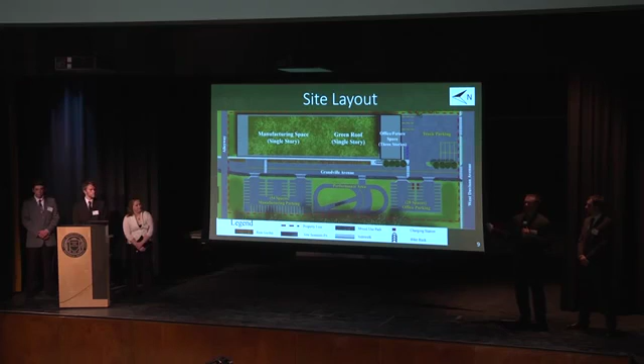Thank you, Ryan. The first part of the structural part of the building was to design the building. The design was developed using Revit 2014. The team decided to make the building 69,600 square feet. The first story, which is the manufacturing with some locker rooms and the display area, is 57,000 square feet and it's 30 feet tall. The second story is directly above the locker room and the display area, and it has some initial offices and the break room. The third story is 7,200 square feet. It spans the entire south end of the building.

The structural scope of this project was to calculate the loads, design the RISA models, determine the steel member selections, design the connections, the connection details, and the floor and roof systems. The load calculations were performed using ASCE 7-10. Snow was determined to be 20 PSF. The maximum snow drift from the third story to the manufacturing building was 40.6 PSF.

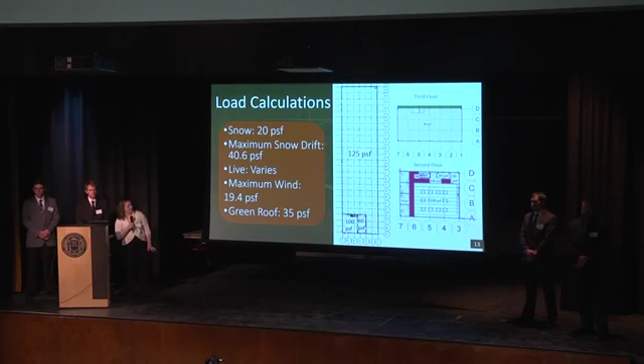The live load varies throughout the building depending on the room, as shown in the figure to your right. And the maximum wind load occurs on the west side of the building with a wind load of 19.4 PSF. The green roof, an additional dead load covering most of the manufacturing building, is 35 PSF. The floor and roof systems were developed using the Vulcraft steel and roof deck system catalog. The floor systems were designed with the same assumptions for load criteria, so the same composite floor system design with 4.5 inches of lightweight concrete and a 1.5VL22 deck size. The 3-story and the manufacturing roofs have slightly different loading criteria, so therefore they have 2 different roof decks.

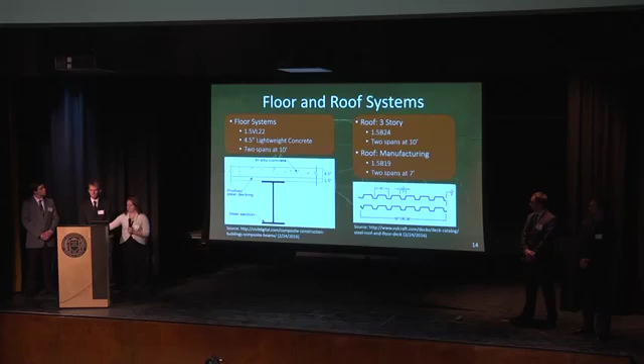RISA was done to analyze the structural aspects of the building. Some of the key features of the structural part of the building are the carrying trusses, which are located every 20 feet, spanning in the east-west direction. The jack trusses, which span in the north-south direction, are located 40 feet apart. The X bracing is along the east and west sides of the building, and the chevron bracing is on every floor of the three-story area.

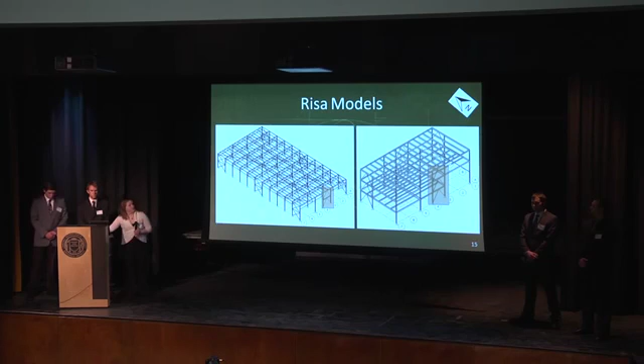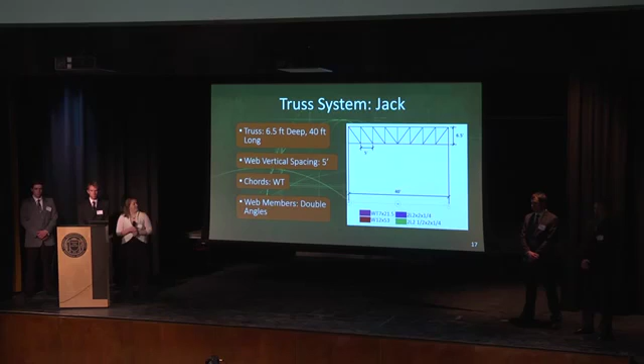Once again, the truss system, the carrying truss, is a Warren-style truss. It is 6.5 feet deep and 40 feet long. It has purlin spacings of 6 feet 8 inches because of the geometry of the truss. The chords are WTs and the web members are double angles. The jack truss is a similar design; however, its web vertical spacing is 5 feet, but it also is 6.5 feet deep and 40 feet long.

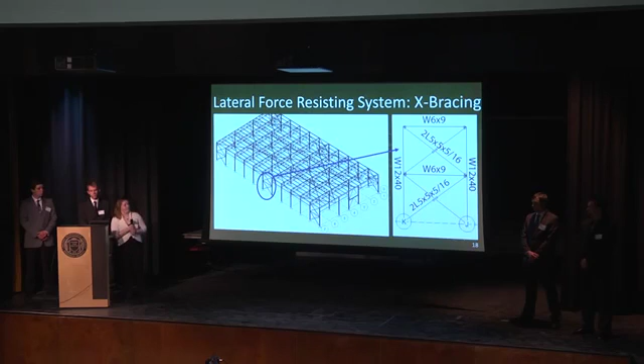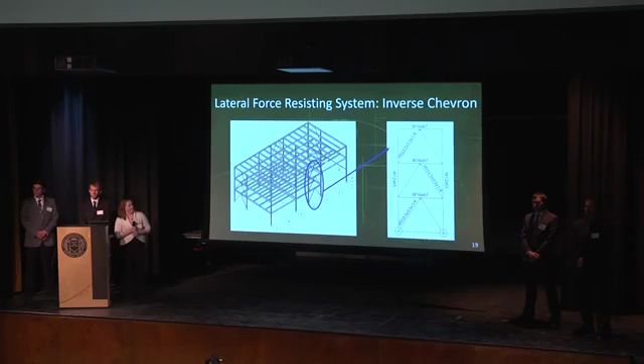X bracing was used as a lateral force resisting system to help with the wind loads applied to the building, along with wind columns. To your right is an example of member sizes for the X bracing. Inverse chevrons were used in the three-story area, also for the lateral force resisting system, and those are some sample sizes for those.

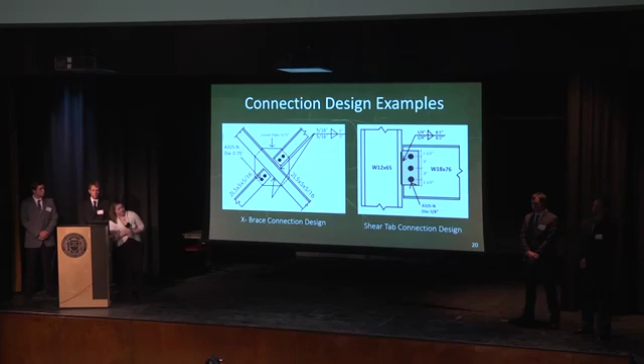Connection design was one of the last things that I had to perform. There were 5 that I calculated. They include truss, shear tab, extended shear tab, X bracing, and the base plate connections. These are the final designs for the X brace and the shear tab. Now I'll pass off to Aaron for geotechnical.

Thank you, Ashley. As the geotechnical engineer, my main focus has been the foundation design for the building after determining a design soil profile for the entire site. I will also be discussing some of the key scope items that I have completed. My research began with consulting the Michigan Quaternary Map to identify the geologic conditions of the local region. Our site in particular features predominantly lacustrine type soils, which results in compressible clays. These softer clays comprise the majority of our soil design profile.

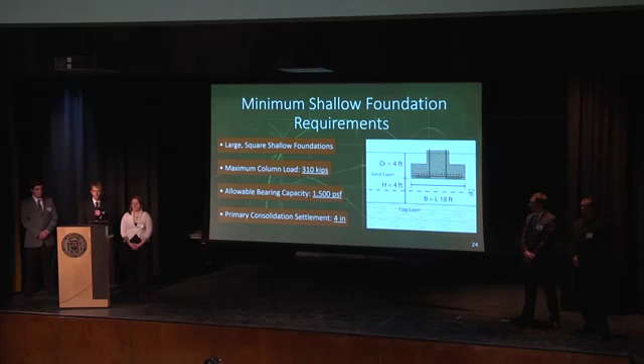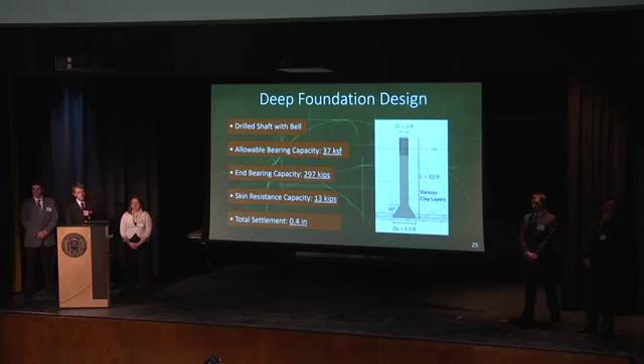At the top of the profile, we have a layer of silty sand. The groundwater table is at a depth of about 6 feet, and at a depth of 51 feet, we encounter the hard pan. The minimum shallow foundation requirements place the footing in the silty sand layer 2 feet above the water table. This allows an allowable bearing capacity of 1,500 pounds per square foot. However, there is over four inches in settlement, so this type of foundation is not suitable. The selected foundation type for our project is the drilled shaft with a belled end. The total length of the foundation is 52 feet to extend and terminate in the hard pan.

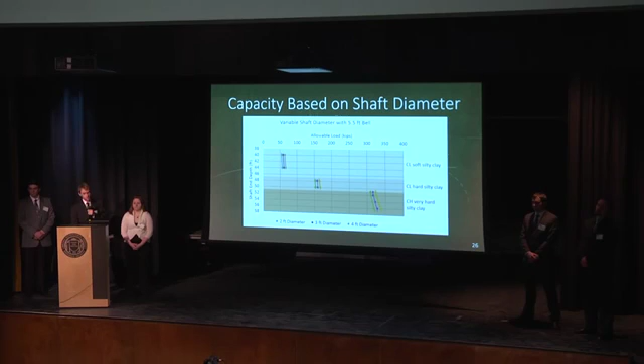This graph is a depiction of the allowable load capacity of one foundation as a function of the length of the shaft, or the length of the foundation, and the diameter of the shaft with a constant fixed bell size. The target depth is at least 51 feet to reach the very hard silty clay layer. There is not much contribution to the overall capacity based on the shaft diameter, so 2 feet is selected in order to minimize cost.

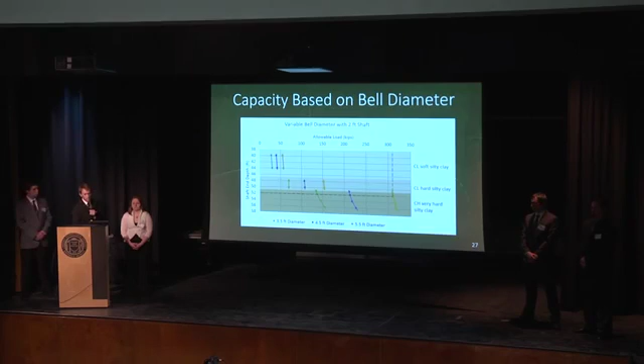This graph, on the other hand, is a similar graph. It shows a constant shaft diameter with a varying bell diameter, and that allows a much greater influence on the allowable load capacity of the foundation. If we have a 52-foot length foundation and a 5.5-foot diameter bell, that allows our foundation to reach the maximum column load.

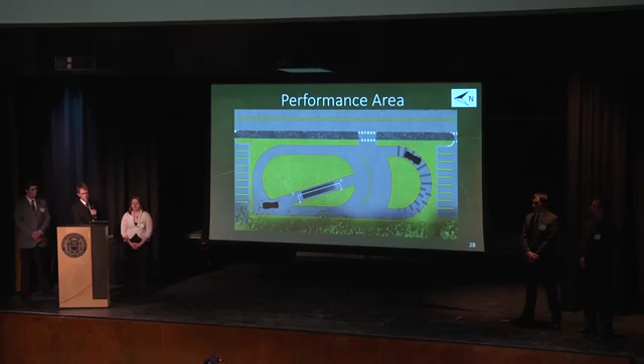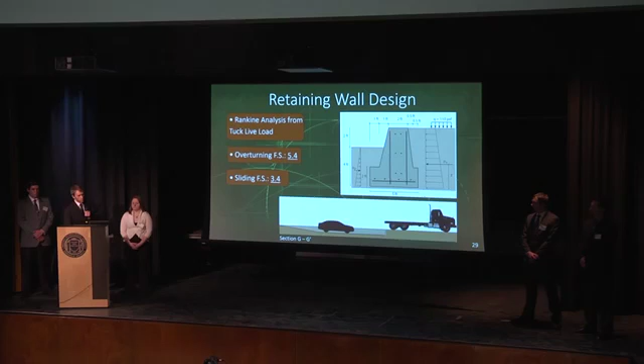The performance area for the complex is one of the major components. It allows Detroit Wrecker Sales to test their products on site. One feature of this performance area is a ramp that leads to a flat pit to allow for a towing scenario. The section at GG shows a 2-foot elevation drop at the pit and a gravity wall retaining system. The truck pulls up to the top of the wall and lowers its bed into the pit and can retrieve the vehicle from inside. The earth is subjected to a live load from the truck, and the gravity walls were designed with a Rankine analysis for active pressure. And now I will hand it off to John to talk about water resources.

Thank you, Aaron. Scope of work for the water resources for the project was to analyze the stormwater removal from the site. It began by gathering the required design documents. From there, the stormwater management plan was developed, taking into account both the environmental and sustainability considerations of the plan. Finally, the discharge water quality from inside the building was assessed. The design documents that were used were first the Wayne County Stormwater Management Program, followed by the Green Infrastructure Plan for the Upper Rouge Tunnel area, and finally the Low Impact Development Manual for Michigan.

Performance standards for the stormwater management plan are broken into two criteria to address environmental impact as well as stormwater runoff. The water resources protection is based on an 80% removal of suspended solids from the first flush of all rain events, first flush being the first half inch that occurs. This removal will happen through capture in the bioretention cells as well as at the pretreatment inlets. Flood protection will occur through detention of 90% storm events. This is the time occurrence, 90% of all storms we can expect to detain on site that are 1 inch or less. 2-year, 24-hour, and 10-year events will be a combination of detention with metered release.

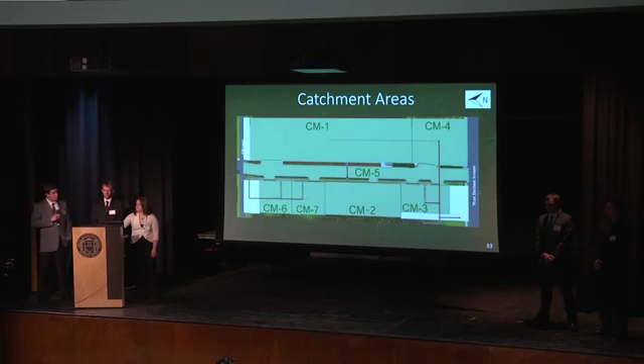Catchment areas were first defined through StormCAD upon inputs from the completed site layout that we had. When the catchment areas were modeled in StormCAD, one of the limitations is we weren't able to model low impact development features. So what you see, catchment 1 is the entire roof area of the building. Catchments 3, 4, 6, and 7 compose the parking lots, with catchment 5 being all of Grandville Avenue. Catchment 2 was left to drain to the earth as it's a pervious structure.

The pipe layout is for a 12-inch concrete circle pipe underground. The arrows dictate the direction of water flow within the pipes. Bentley StormCAD uses the rational method, which is required by Wayne County, to calculate the runoff into all the catch basins, which are shown in pink here. The yellow circles indicate overflows from the low impact development features.

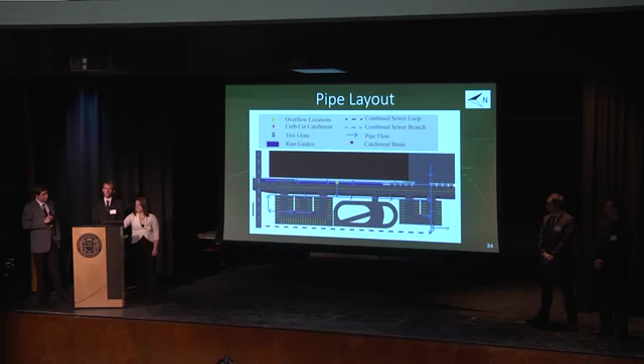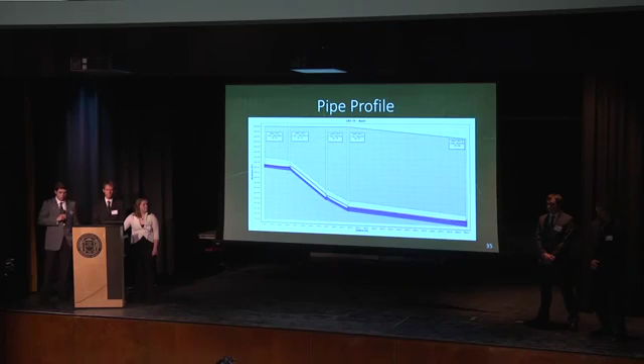Pipe profiles were generated from Bentley StormCAD, and it was required that we have 2.5 feet of vertical clearance to the structure rim on the furthest structure from the outlet, which is shown here. Water protection is going to occur on Grandville Avenue with 2 features. There's a 3,000-foot rain garden out front of the building, as well as a 3,400-foot grass-lined channel to promote infiltration and capture the first flush along Grandville.

The green roof, once it was able to be put in, is our biggest low-impact development feature. It's over 1 acre in size. It's 2.5 inches planted with sedum. It is going to retain 41,000 plus gallons. The important feature of this is it'll provide our client $9,000 a year in savings for the Detroit Water and Sewerage Department. We installed a capture and reuse system on the southern portion of the roof.

It was designed from concept using a 20-year analysis of the urban green stormwater calculator to provide $800 in yearly savings on the water and sewer combined. It's a 2,000-gallon spiral reinforced polyethylene tank that can be buried underground for best management practice. The discharge water quality is going to be the last thing.

Inside the building, we have 2 connection points. And the National Pollutant Discharge Elimination System regulations are covered under the Green Infrastructure Plan. And it is further known that we will not be known as a significant industrial user by the Water and Sewerage Department. So we will not require additional regulations for discharge water quality within the building. Now I'd like to ask Zach to speak about the transportation engineering.

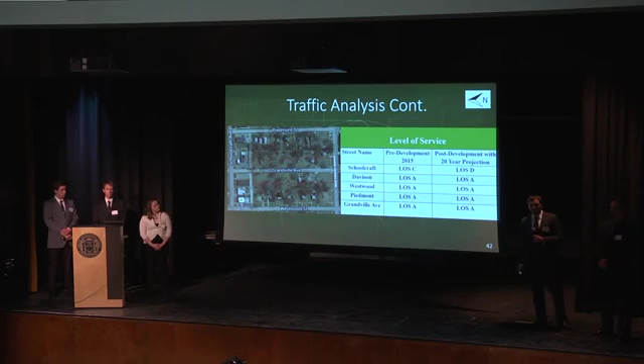With that, I was then able to calculate the level of service for all the surrounding streets and of Grandville. As you can see here, everything stays level of service A, except for Schoolcraft, which drops 1 from level of service C to level of service D. During the safety analysis of the surrounding streets, it became evident that the Westwood and Schoolcraft intersection seemed to be a hot spot for crash incidents. So after further investigation, it turned out to be a high volume of turning movement incidents.

As you can see here, there is no dedicated left-hand turn lane from Schoolcraft onto Westwood, and with south of Schoolcraft being primarily industrialized, there's a lot of turning movements in that intersection. And since the Schoolcraft and Westwood intersection is going to be our primary source for our material reaching our site, we decided to upgrade that intersection. Here in the upgraded intersection, you can see that we actually have that dedicated left-hand turn lane, which we're hoping will eliminate all those turning movement issues.

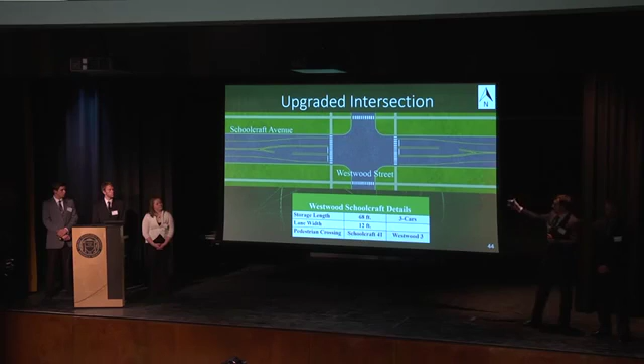The nice thing here is there were 2 existing parking lanes on the north and south side of Schoolcraft, so what we were actually able to do was shift the through traffic into that parking lane through the intersection and back over to the traditional through lanes. The nice thing with this is there was no major reconstruction required, as all this fit within the existing pavement, so all that would be needed to upgrade this intersection would actually just be restriping.

Moving inward to the site, the transportation portion of this consists of the redesign of Grandville Avenue and the parking lots and the loading docks. So starting with the parking lots, on the northwest side of the site, we have the larger parking lot, which is mainly for the manufacturing and skilled trade employees for the manufacturing space, while the southwest parking lot is primarily for the office employees. And on the far south side of the building, that is where our loading dock is, where we have truck chassis storage, where our raw materials are going to come in and be offloaded and brought into the facility.

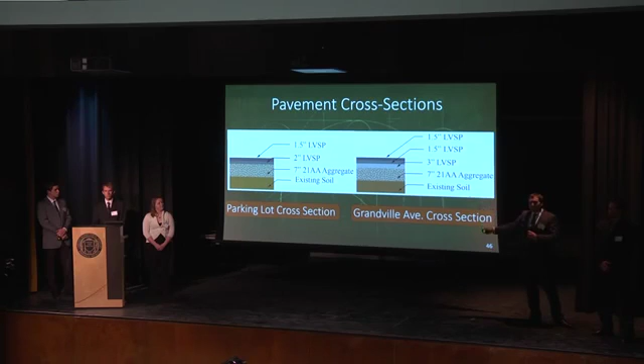Using the calculated traffic count projection, I was able to use the nomographs to develop my pavement cross-section. According to the nomographs, I only needed a 3.5-inch cross-section, but since we are in Wayne County, it requires a minimum of 6 inches of pavement. So I had to then manipulate what I calculated using nomographs to fit Wayne County standards. But I still utilized the existing 3.5-inch cross-section and used that for the parking lots on the west side.

Here's a full cross-section from right-of-way to right-of-way of Grandville Avenue. You can see here we have our 6-inch cross-section on our 21AA. The road is 30 feet wide from face to curb, and the pavement of choice that we used was asphalt, the low-volume Superpave. I'll now hand it over to Brian for construction.

Thank you, Zach. The construction update can be broken into 5 key points. The first being the scope management plan, the second being my logistics management plan, the third being my sustainability management plan, and then fourth, schedule, and lastly, cost. For my scope management plan, the first thing done was the entire team was taken out to the site for a thorough site investigation. This allowed everyone to have input on risks that they might see, and a risk register was created for the entire project.

With this, we initially spent time in the city of Detroit gathering information on other site constraints. We're going to take a look at some of the site constraints right now. The first site constraint you're seeing right now is our setback requirements. As you can tell on the south side of the site, there are some easements that run through for both our combined sewer and our existing electric. Those cannot be moved. We've got our water on our site, our gas main on the site, our electric, as you can tell, there's one pole, so there's one existing light on the site. And then lastly, our existing combined sewer for the site.

With most of the design complete, a logistics management plan was developed. There's 2 phases to this logistics management plan. The first phase involves traffic being allowed to flow through the site as we leave the road in place for most of the construction. Some key features of this plan consist of fencing the site in and maintaining almost all contractor items on the south side of the site, as there will be a guardhouse and a guard station there for the entire duration due to the neighborhood this construction is taking place in.

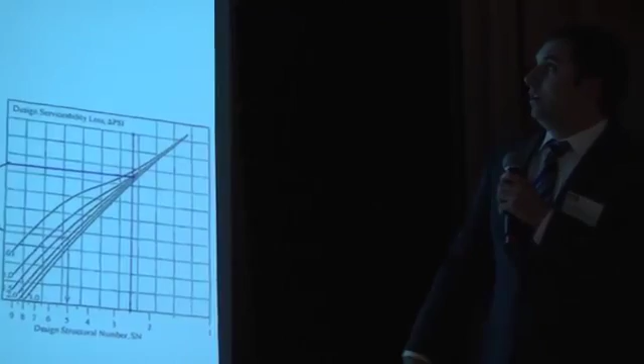You had mentioned the neighborhood being an issue during construction. How are you planning to address the security of people working in the area when the construction is done? I don't know who's best to answer that question, but I wonder if that was in the site planning. Do you have security considerations?

The main security consideration that we looked at was actually lighting at this point. Fences were mentioned and brought up. It would be something that we would talk to the owner about, as to whether he'd like to see all of the parking lots fenced in. When speaking with them, they said during the day they did not have any major issues. However, at night it was not the best of areas.

My next question is, in an assembly building such as this, there's a material handling issue. Did you plan for material handling in your structure? Through our structural engineer over here?

Can you elaborate? Well, let's suggest in the manufacturing building, you often see bridge cranes that will move materials because you bring in raw materials on one side, you have a finished product going on the outside. And I'm just wondering, you have a fairly substantial roof framing system, and I'm wondering if your column or the roof framing is considering crane load or material handling loads.

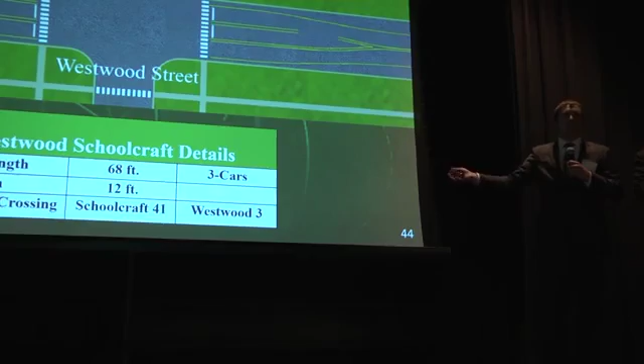So 68 feet is the longest vehicle you... No, I'm sorry. I have 68 feet worth of storage. I'm saying that I have approximately 3 cars worth, so a 53-foot semi-truck trailer could fit in that turning lane. Okay, so I'm interested in the turning radius. How long a vehicle did you design the turning radius for? The turning radius, I actually did not adjust that. That was already set from what it was before. I'm not 100% sure off the top of my head what the existing radius is, but I can look into that. I just tried to minimize the amount of impact on this intersection.

Okay. What is the posted speed limit for Schoolcraft Avenue? Do you know? I believe in this section it was either 25 or 35. Okay, so it's very low. Did you look at the rate of shift when you were shifting your through lanes over 6 feet to accommodate your center turn lane? Yes, I used the equations with the posted speed to make sure that the shift wasn't too dramatic. And is it based on a deflection, or did you use horizontal curves? I used the horizontal curve.

I have one last question about the site layout. Were any of the turning radii looked at on site? I think there were overhead doors on the west side of the building as well as the south side of the building. Was the intent for the overhead doors on the west side for large trucks to enter and exit? Were large trucks expected to enter and exit from that door?